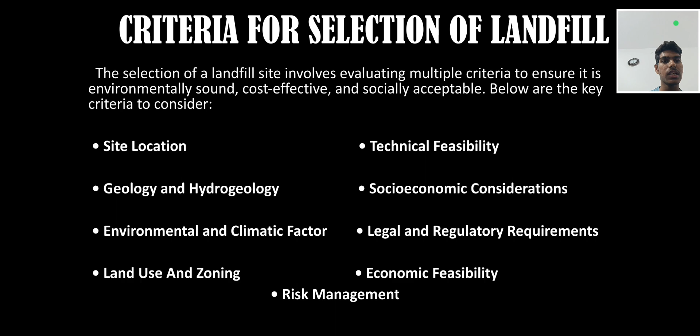Below are the key criteria to consider: site location, technical feasibility, geology and hydrogeology, socio-economic considerations, environmental and climatic factors, legal and regulatory requirements, land use and zoning, economic feasibility, risk management.

Site location: proximity to population. Landfills must be located far from residential areas to minimize negative effects such as odor, noise, dust, and potential health hazards. Proximity to waste source. The closer the site is to waste generation areas, the lower the transportation cost and greenhouse gas emissions from hauling trucks.

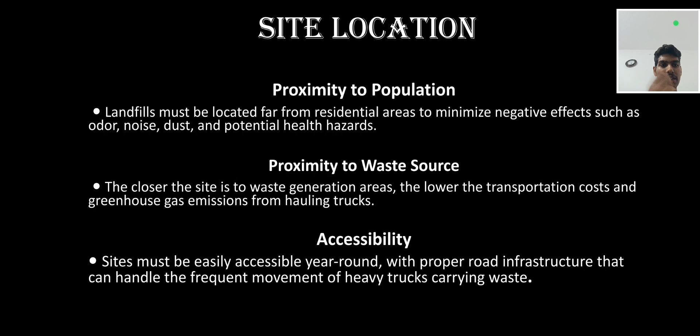Accessibility. Sites must be easily accessible year-round with proper road infrastructure that can handle the frequent movement of heavy trucks carrying waste. Geology and hydrogeology, soil type. The site should ideally have clay or other low permeability soils to act as a natural barrier, reducing the risk of leachate infiltration into the groundwater.

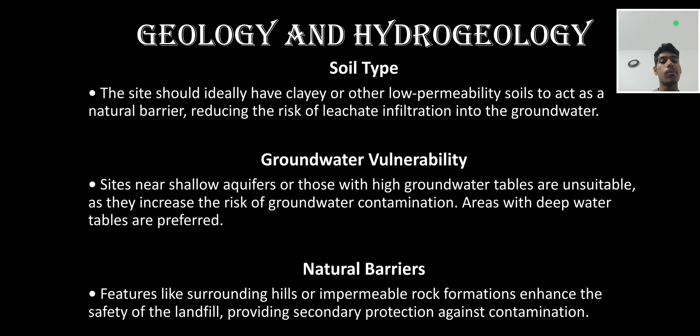Groundwater vulnerability. Sites near shallow aquifers or those with high groundwater tables are unsuitable as they increase the risk of groundwater contamination. Areas with deep water tables are preferred. Natural barriers. Features like surrounding hills or impermeable rock formations enhance the safety of the landfill, providing secondary protection against contamination. Environmental and climatic factors.

Surface water proximity. Sites must not be located near rivers, lakes, wetlands, or reservoirs to avoid the risk of leachate contaminating surface water sources. This requires adherence to regulations specifying minimum distances from water bodies. Flood risk. Avoid low-lying areas prone to flooding as excess water can overwhelm landfill systems, increasing leachate production and risk of surface water contamination.

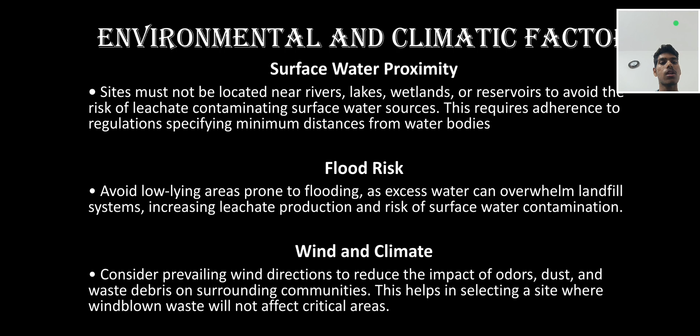Wind and climate. Consider prevailing wind directions to reduce the impact of odors, dust, and waste debris on surrounding communities. This helps in selecting a site where wind-blown waste will not affect critical areas. Land use and zoning. Compliance with land use plans. The site must align with local zoning regulations and future urban or rural development plans. Misalignment with land use plans can lead to legal disputes and operational challenges.

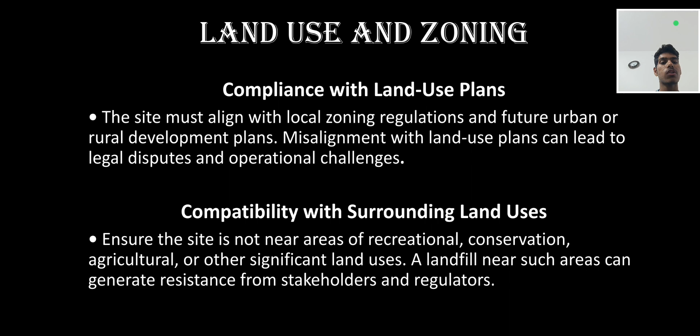Compatibility with surrounding land uses. Ensure the site is not near areas of recreational, conservation, agriculture, or other significant land uses. A landfill near such areas can generate resistance from stakeholders and regulators. Technical feasibility, site capacity. The selected site should have sufficient capacity to handle both current waste disposal needs and projected future demands over the landfill's operational lifespan.

Slope and topography. Gentle slopes minimize construction cost and provide natural drainage management. Steep slopes increase the risk of instability, while flat areas require significant drainage systems. Cover material availability. Daily cover materials such as soil are required to minimize odors, control pests, and manage landfill fires. The availability of these materials near the site is an important consideration to reduce operational costs.

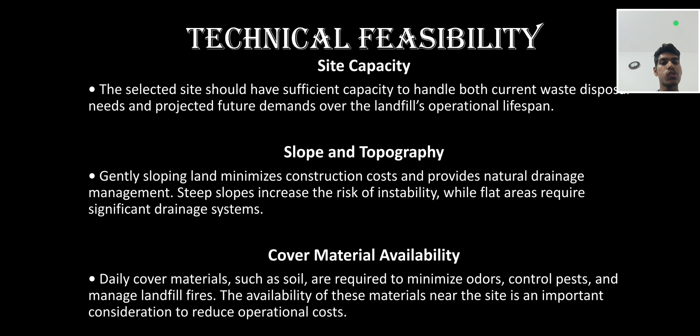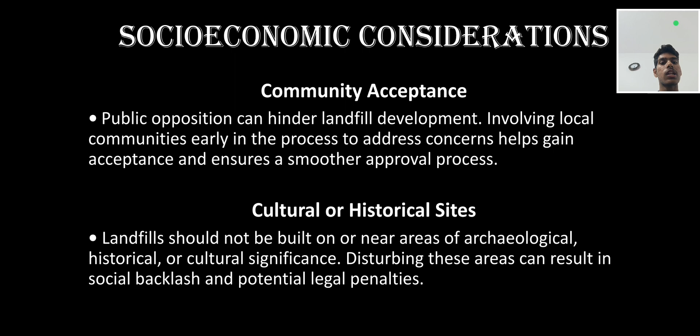Socio-economic considerations, community acceptance. Public opposition can hinder landfill development; involving local communities early in the process to address concerns helps gain acceptance and ensures a smoother approval process. Cultural or historical sites. Landfills should not be built on or near areas of archaeological, historical, or cultural significance. Disturbing these areas can result in social backlash and potential legal penalties.

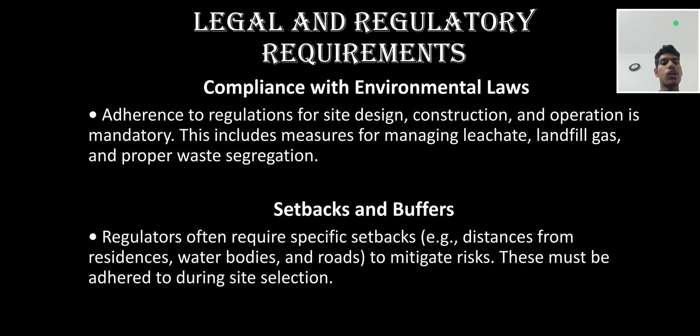Legal and regulatory requirements, compliance with environmental laws. Adherence to regulations for the site design, construction and operation is mandatory. This includes measures for managing leachate, landfill gas, and proper waste segregation. Setbacks and buffers. Regulators often require specific setbacks, for example distances from residences, water bodies, and roads. To mitigate risk, these must be adhered to during the site selection.

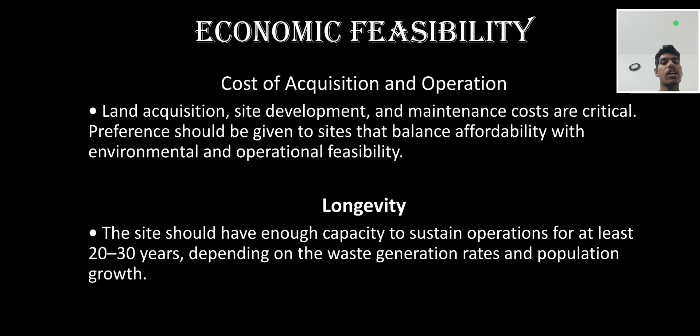Economic feasibility, cost of acquisition and operation. Land acquisition, site development, and maintenance costs are critical; preference should be given to sites that balance affordability with environmental and operational feasibility. Longevity. The site should have enough capacity to sustain operations for at least 20 to 30 years, depending on the waste generation rates and population growth.

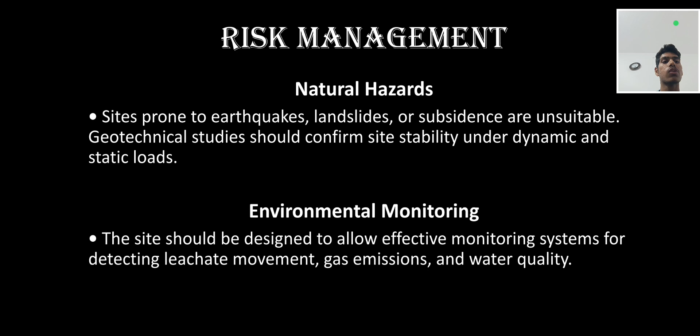Risk management. Natural hazards. Sites prone to earthquakes, landslides, or subsidence are unsuitable. Geotechnical studies should confirm site stability under dynamic and static loads. Environmental monitoring. The site should be designed to allow effective monitoring systems for detecting leachate movement, gas emission, and water quality.

Urban flood control. What are urban floods? Urban flooding describes the flooding of land or property within a constructed environment, especially in locations that are more densely inhabited, like cities, as a result of excessive rainfall that exceeds the capacity of drainage systems. Urban flooding is significantly different from rural flooding, as urbanization leads to developed catchments, which increases the flood peaks from 1.8 to 8 times and flood volumes by up to 6 times. Consequently, urban flooding occurs very quickly due to faster flow times, in a matter of minutes.

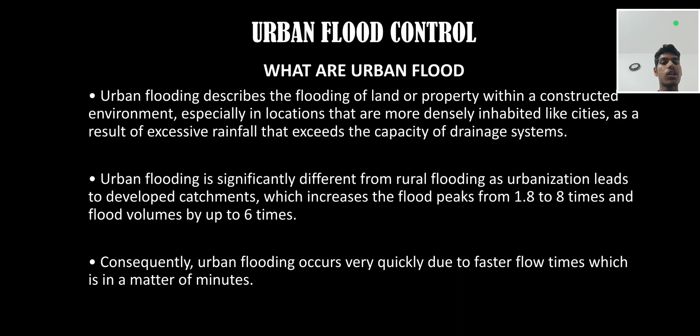Causes of urban flood: higher rainfall, storm surges and frequent depressions in open waters, depleting groundwater tables, heavy melting of snow causes flash floods in lower catchment areas, rising sea levels due to global warming, encroachment on drainage areas like lakes, wetlands, and riverbeds closes the ways for the excess water to flow, thus causing floods.

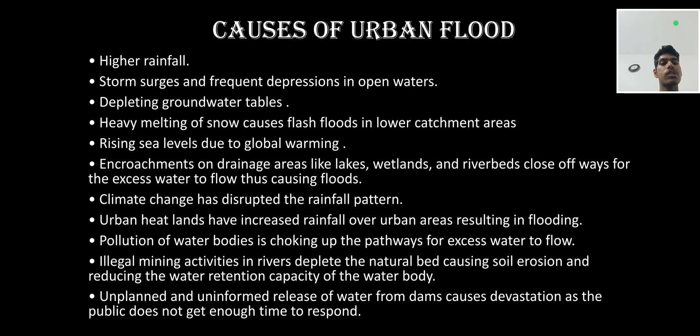Climate change has disrupted the rainfall pattern. Urban heat islands have increased rainfall over urban areas, resulting in flooding. Pollution of water bodies is choking up the pathways for excess water to flow. Illegal mining activities in rivers deplete the natural bed, causing soil erosion and reducing the water retention capacity of the water body. Unplanned and uninformed release of water from dams causes devastation as the public does not get enough time to respond.

Controlling methods. Build away from floodplains and flood-prone areas. This is the best way to ensure less loss of life and property. The development of blue-green infrastructure will be effective in providing sustainable solutions to urban climate challenges. Better water management should be ensured, like including rainwater harvesting in all infrastructure developments. Geospatial technology should be utilized for flood vulnerability mapping, which will aid in better planning for development.

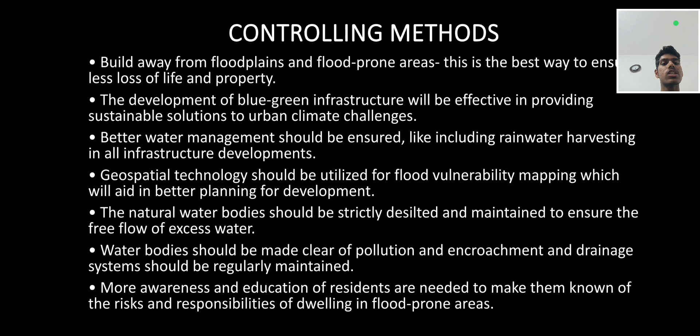The natural water bodies should be strictly desilted and maintained to ensure the free flow of excess water. Water bodies should be made clear of pollution and encroachment, and drainage systems should be regularly maintained. More awareness and education of residents are needed to make them know of the risks and responsibilities of dwelling in flood prone areas. Thank you, guys.